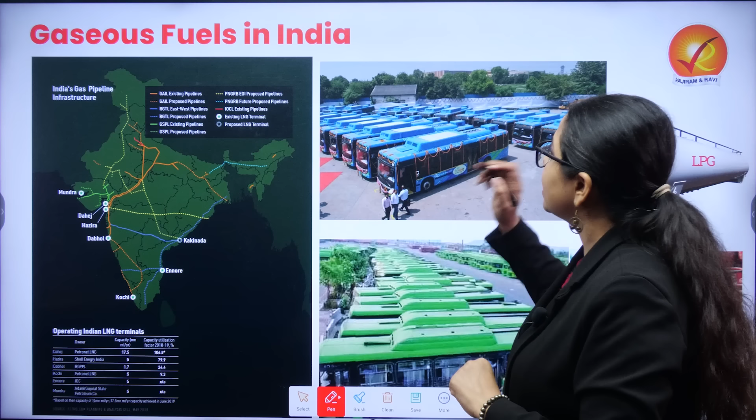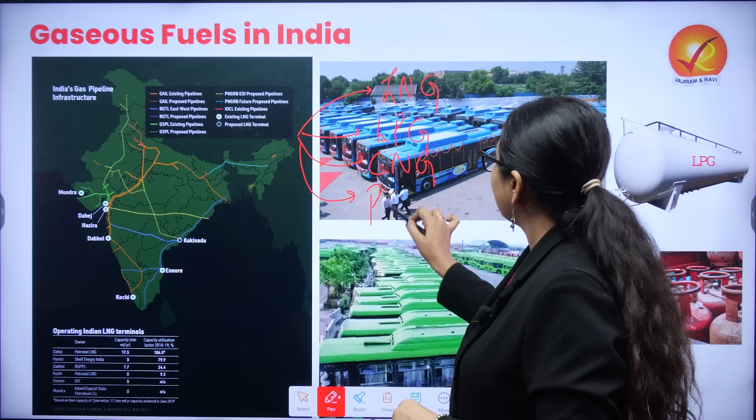So when we are talking about gaseous fuels, we have four alternatives we are going to discuss in detail: LNG, LPG, CNG and PNG. Now let us try to understand how they differ, and along the way we will also try to understand how import dependent India is in terms of these gaseous fuel alternatives.

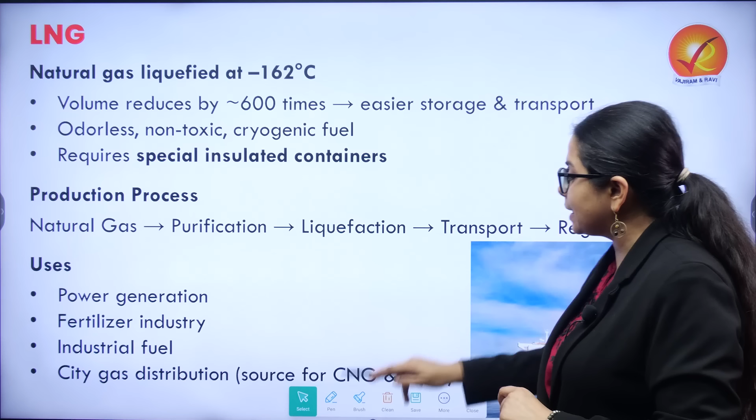We will start with the first one, LNG, liquefied natural gas. This is natural gas which is liquefied at a very low temperature, that is minus 162 degrees Celsius. This reduced temperature leads to reduction of the volume of the gas, and the reduction of volume is by 600 times.

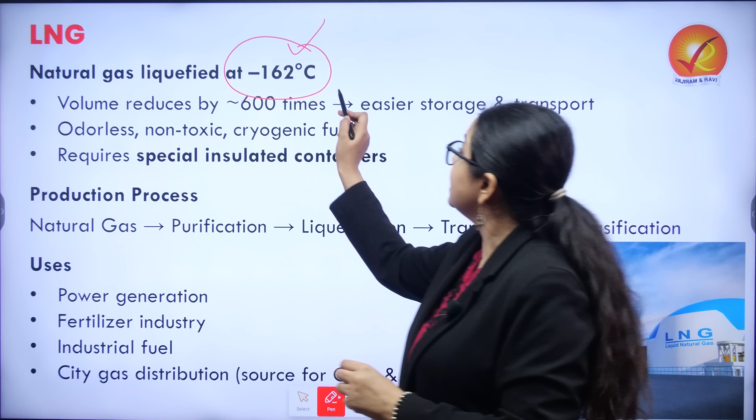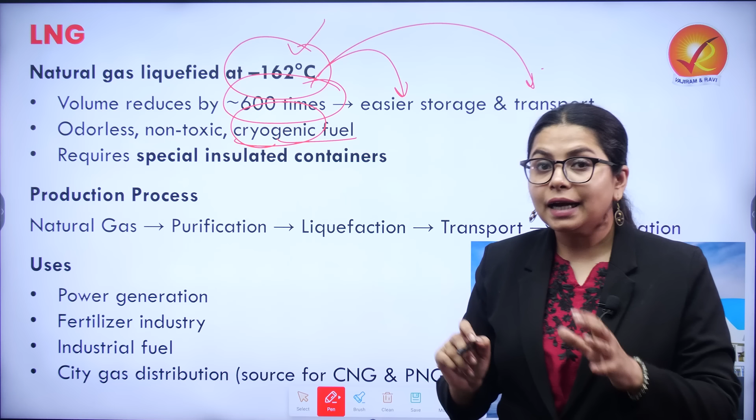Now why is it done? Because by this method it is easier to store and also easier to transport. This particular gas is odorless, non-toxic, and also a cryogenic fuel, and that is why it requires special insulated containers. The creation of this gas is facilitated by cryogenic technology itself.

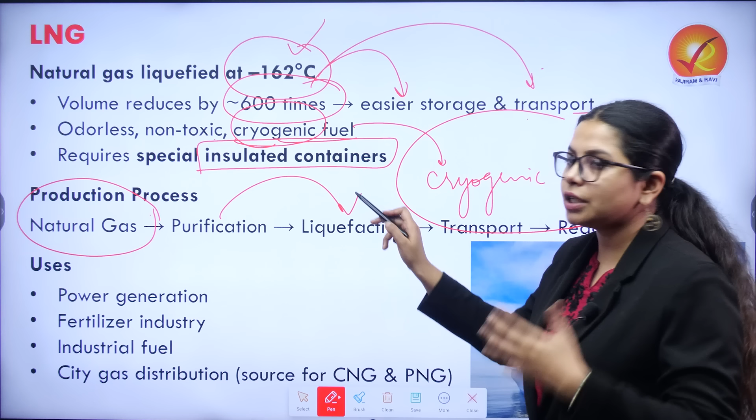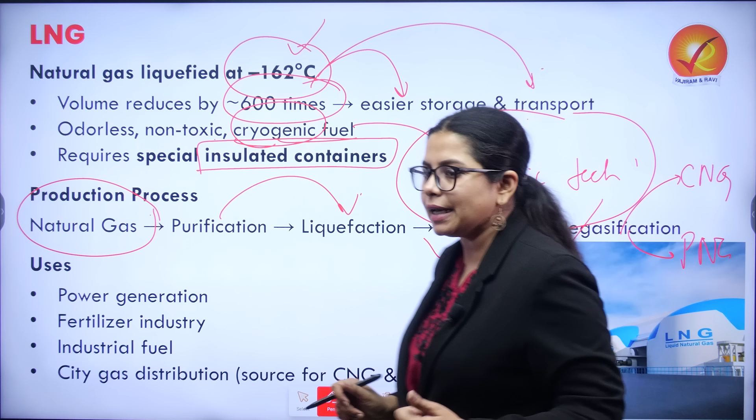That is why the infrastructure of LNG is highly specialized. When we are producing LNG, it starts from natural gas, it is purified and then liquefaction takes place, which is later transported and regasified. This is where we get CNG and PNG as well, so regasification occurs as CNG and PNG. As you can see in the given tankers here, this is how LNG is transported in general.

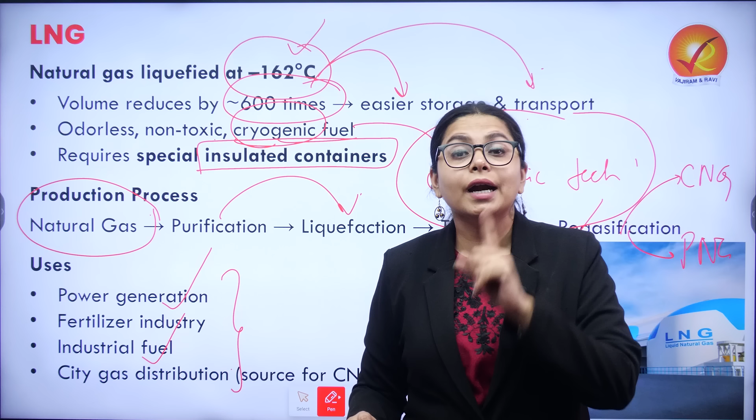Now when we are talking about LNG, it is broadly used not only for power generation but is very significant as industrial fuel and a huge component in city gas distribution. Because India is absolutely import dependent in terms of LNG, 100% import dependence, all these sectors are going to be hit if our LNG supply is cut off from West Asia.

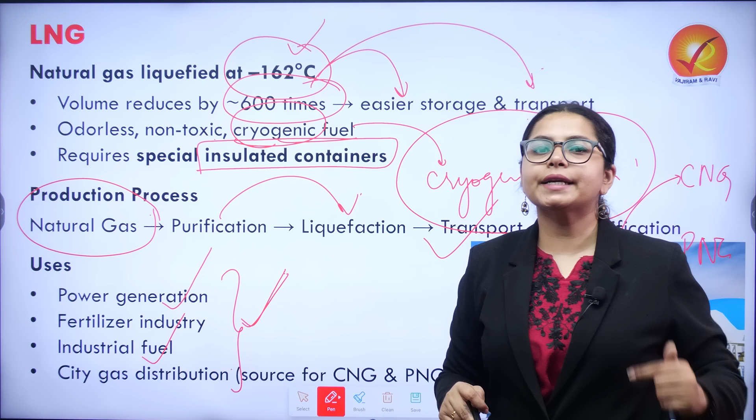Now we will move straight to the next gaseous fuel, that is LPG, liquefied petroleum gas. This is the most common form of gaseous fuel present around us, which is stored and present in cylinders. This is an energy fuel which you regularly see in your households.

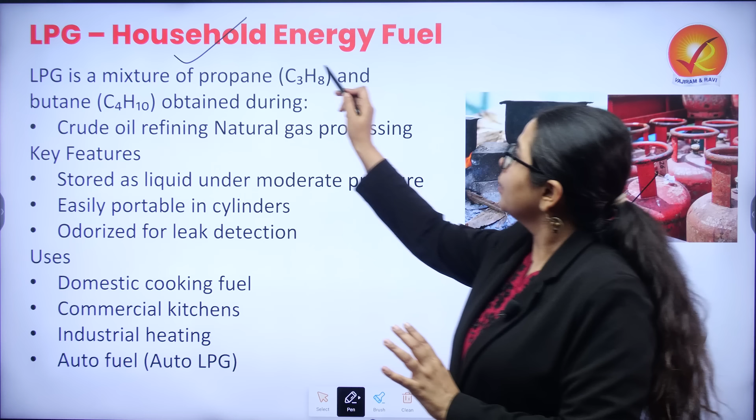When we talk about LPG, it is a combination byproduct of petroleum processing and natural gas processing, and it exists as a mixture of propane and butane. So crude oil refining and natural gas processing, both combinations are important for the production of LPG.

Now when we are talking about LPG, you have to remember that this is heavier than air. So as a property, because it is heavier than air, whenever there is a leakage, it settles on the ground and it can work as a fire hazard.

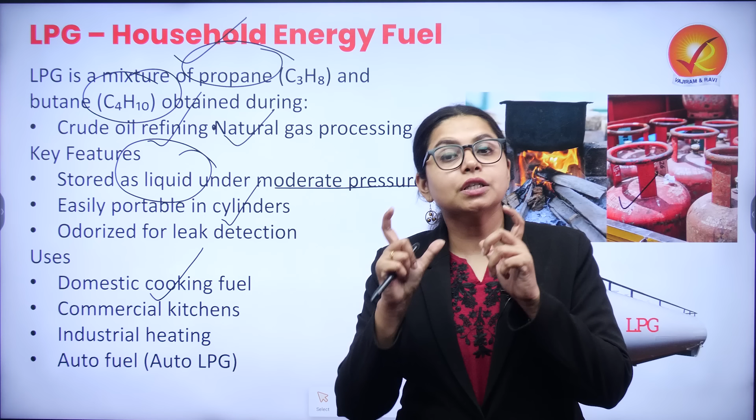So when we are talking about storage, it has to be kept very proper, otherwise it can lead to hazards, and the storage is done as liquid under moderate pressure. It is easily portable in cylinders like we usually see, and it is also odorless. The odor is inserted so that if there is any leakage, we can detect it. It is highly used in domestic cooking fuel and commercial kitchens. That is why the LPG shortage led to the invocation of the ECA Act.

You can go and watch the video on the ECA Act, which I have covered in detail already.

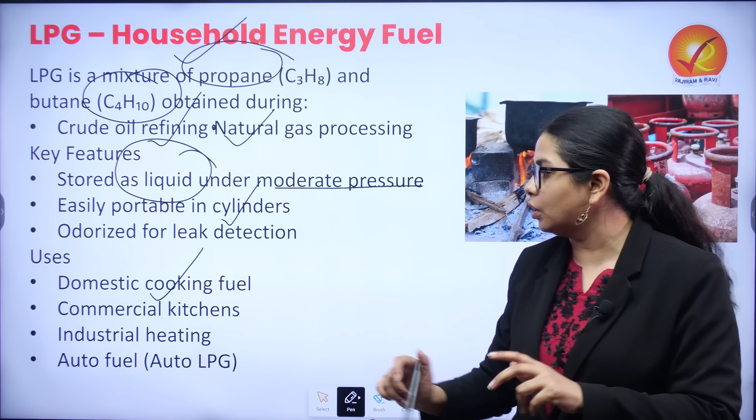So when we are talking about usage of LPG, it's not just in commercial kitchens and households, but also in industrial heating, and in a few places as auto fuel where we find auto LPG's usage.

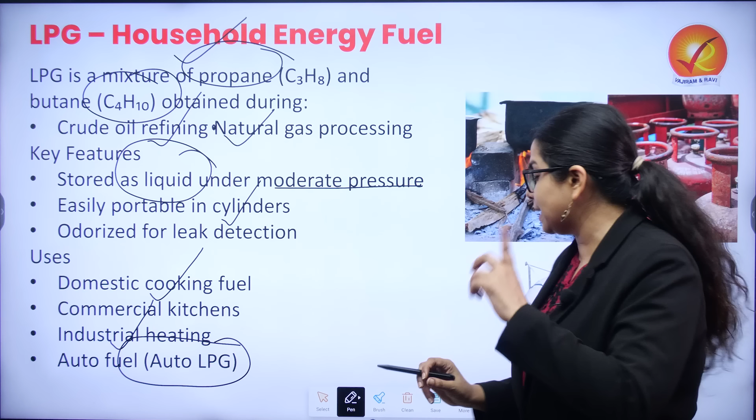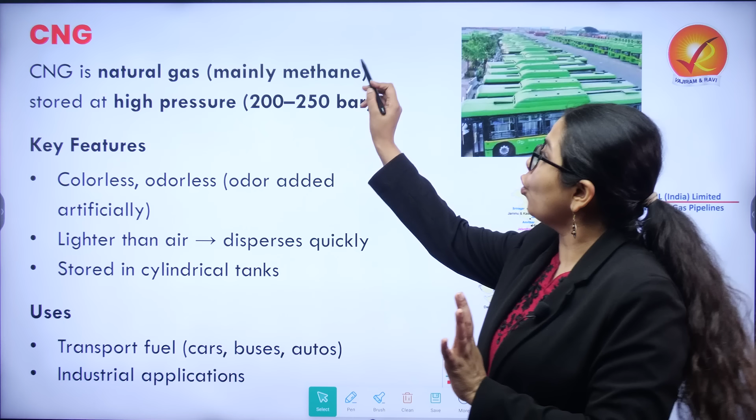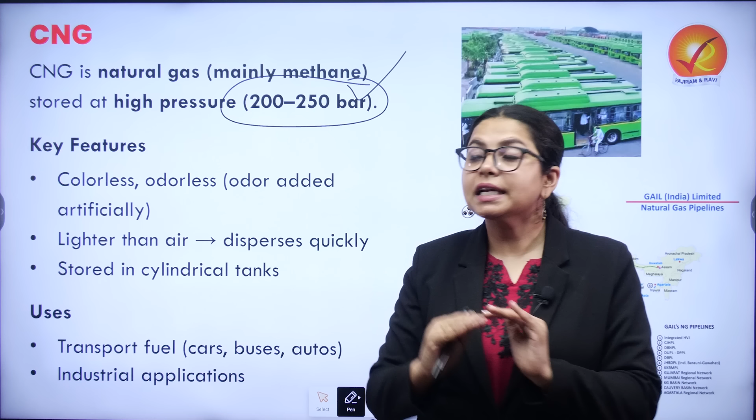Now we will move to the next gaseous fuel that we are covering, that is CNG. CNG, or compressed natural gas, is nothing but LNG or PNG which is highly compressed, mainly methane, compressed at high pressures. It is a colorless, odorless gaseous fuel. Recall that LPG is heavier than air, but CNG is lighter than air, making it comparatively safer because it disperses quickly and does not emerge as a bigger fire hazard.

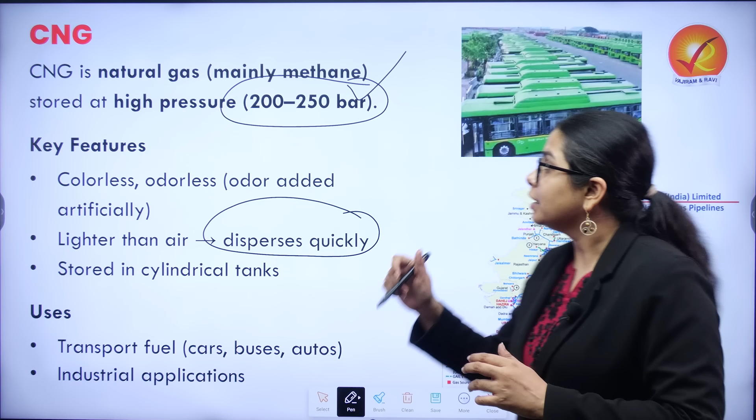CNG is usually stored in cylindrical tanks and is a great alternative to fossil fuels because it is comparatively cleaner. That is why public transports running on CNG are usually painted green. It is a comparatively cleaner fuel used as transport fuel for cars, buses and autos, and CNG has a lot of application in industries as well.

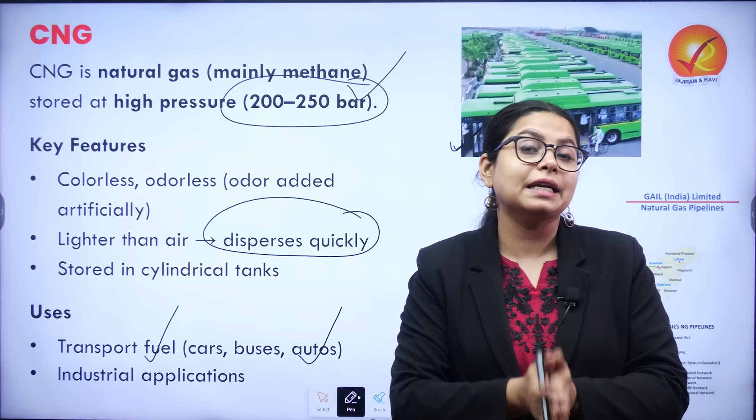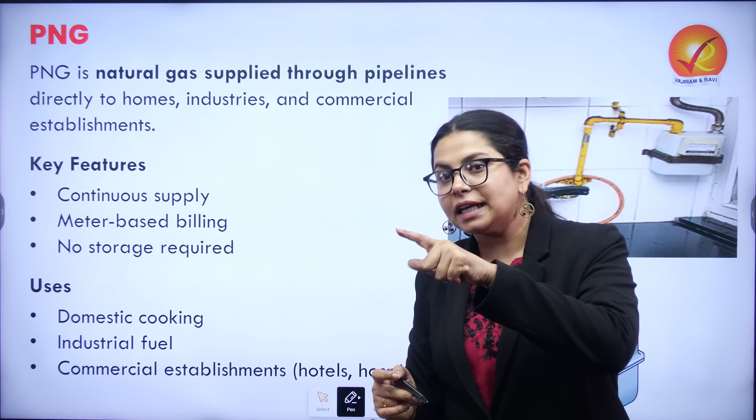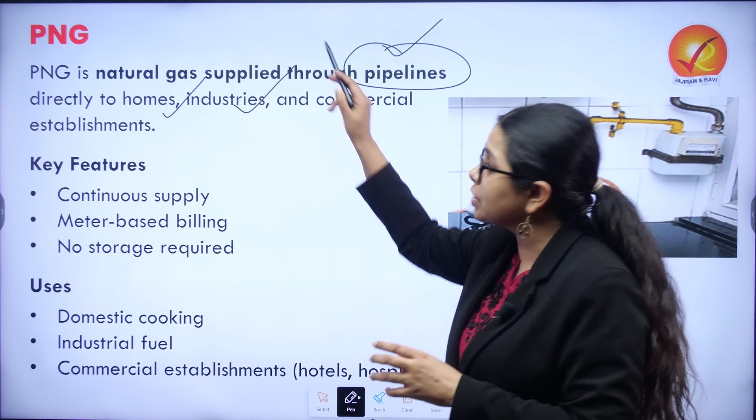Now we move to the next gaseous fuel left with us, that is PNG. PNG, or piped natural gas, is also derived from LNG. PNG is natural gas directly supplied through pipelines, which can be utilized in homes, industries and commercial establishments. The pressures are limited and it is always directly supplied in gaseous form.

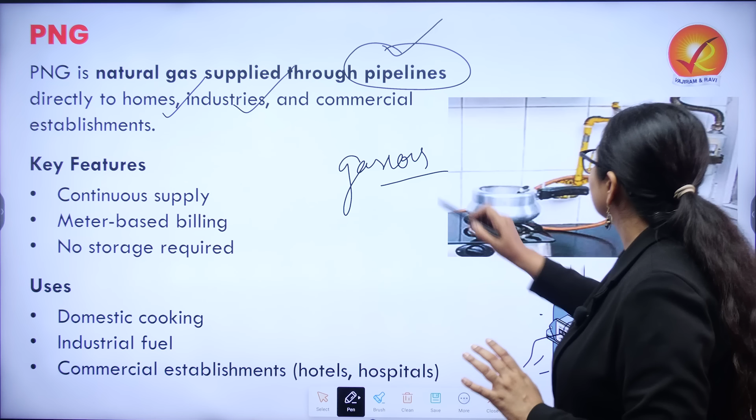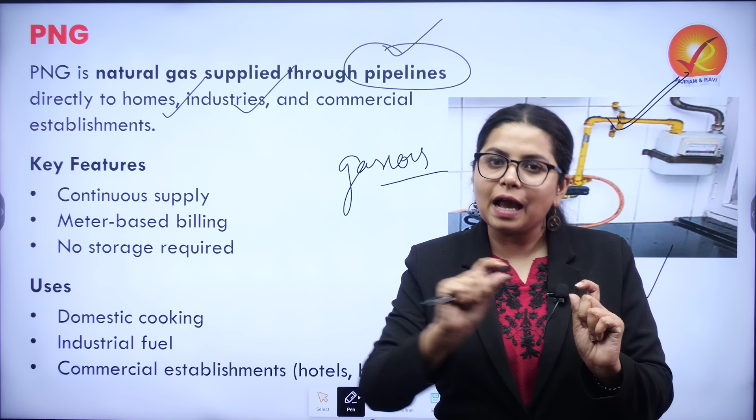As you can see, it is installed in kitchens and commercial kitchens, and the supply given is continuous. It is measured by proper meters installed, and there is no storage required - the storage happens in the pipe itself, with continuous supply. Its usage is gradually picking up in terms of domestic cooking, industrial fuel, and most importantly in commercial establishments such as hotels and hospitals.

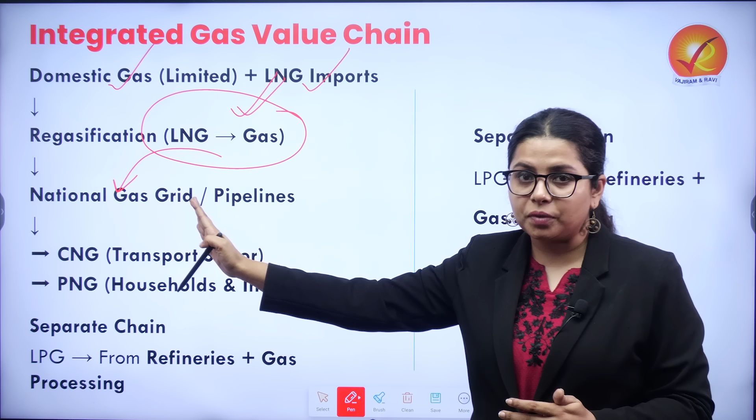Now that we have covered four gaseous fuels, let us understand the whole gas value chain. We have LNG, which as I told you, we are 100% import dependent on, coming through imports. Then we have domestic gas which is produced. After that, regasification takes place and LNG is converted into gas. This gas is put into the national gas grid and pipelines, which we saw in the maps in earlier slides, and this national gas grid supplies CNG to the transport sector and PNG to households and industry.

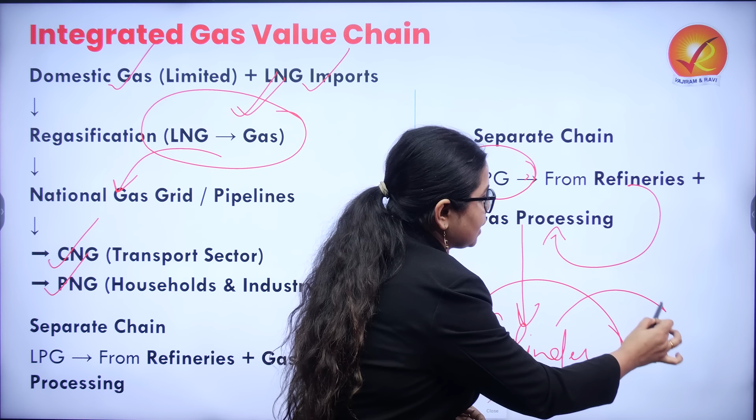But when we are talking about LPG, it exists in a totally separate chain because LPG is formed through crude oil refining and natural gas processing, and from those refineries and gas processing units, it is directly stored in cylinders and then transported from there. So I hope you have fair clarity on how the production, composition, and usage are all different.

And at the start, we talked about understanding their import dependence. So let us now move towards that.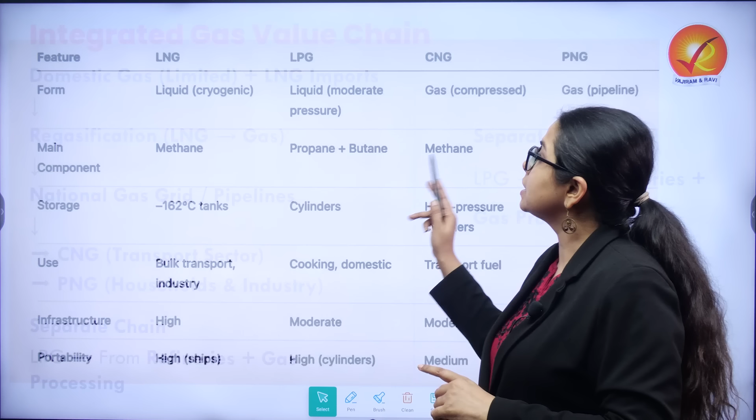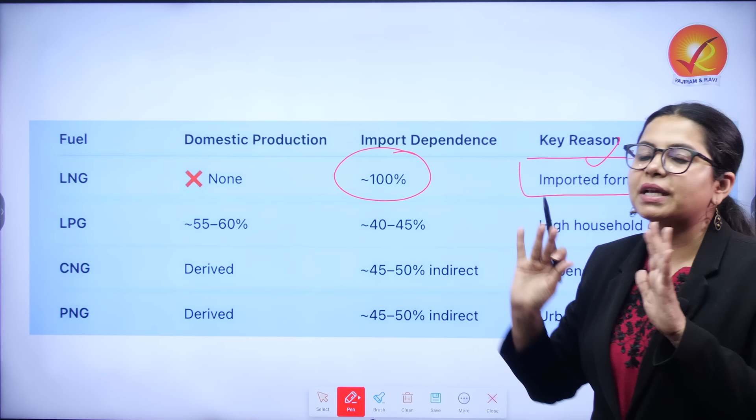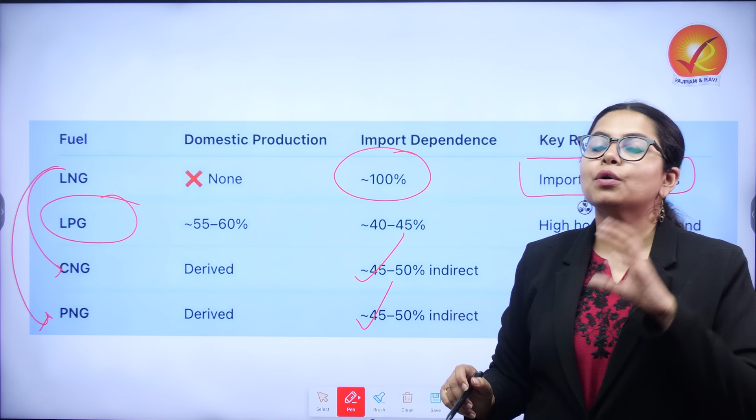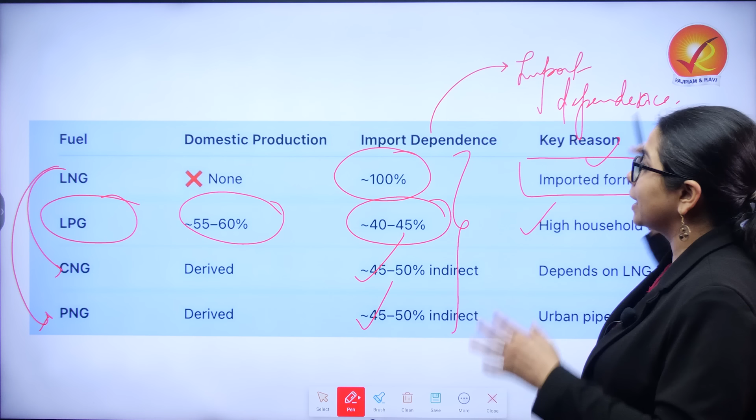Now talking about import dependence, when we look at LNG, I had already discussed that the import dependence is 100%, and we have imported gas only. But CNG and PNG are derived from LNG, and because domestic production is also derived from it, we have limited import dependence in terms of CNG and PNG. But for LPG, we only have 55 to 60% domestic production. We are hugely dependent, 40 to 45%, on imports because we have immense high household demand. This huge import dependence also shows that when it comes to energy security and being a gaseous fuel-led economy, we have a long way to go.